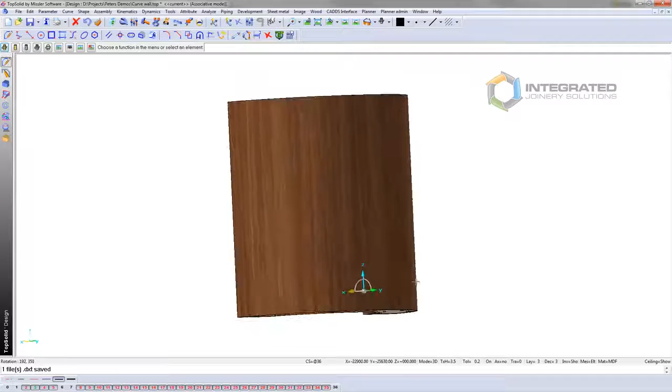What we've got here is a typical wall for a project, and this wall has been built up using an internal frame and clad on the outside like you normally would. But this wall has been built as a smart assembly, so we can use a single assembly to cater for all the different curved wall variables that we can encounter on this project.

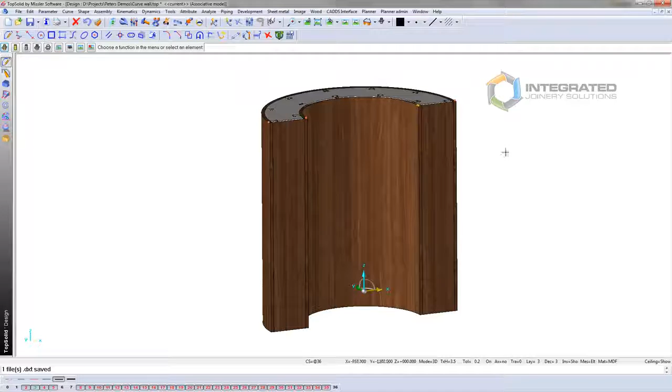So let's remove the outside skins. We'll click on them, move them out of the way, and I might lay this down so you can see a bit better what it looks like. Here we go, I'll move that back over there.

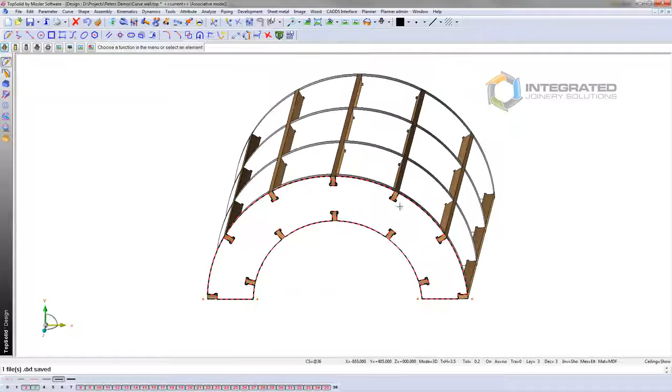Now you see how this is made. You've got your ribs and we've got rails. We've housed the ribs into the rails with these little slots that have been routed in, and you'll notice we've got a 1.5mm gap between the edge of the rail and the jaw of the groove.

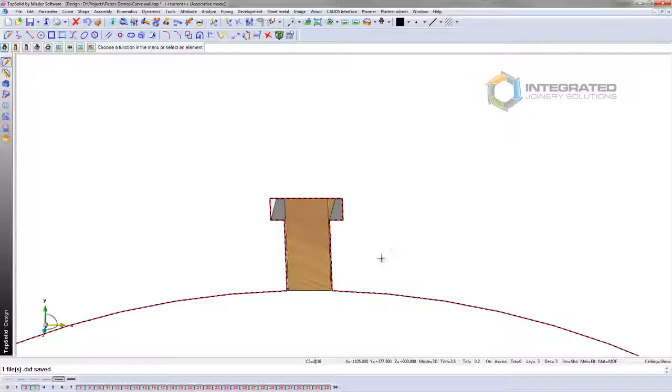And then we've done these little slots off to the side, which facilitate removing the internal radius you might get here if we didn't have them. So we've got a complete flat surface for the rail to sit down onto those ribs, so there's no need for chiseling or any other work like that.

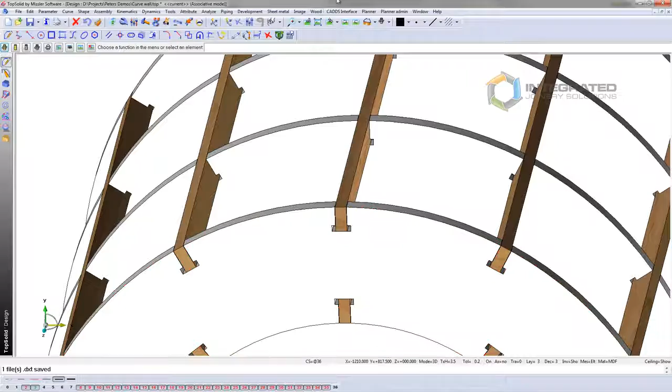So what we want to do is demonstrate how this can be changed on the fly, this one assembly, to cater for all these different things.

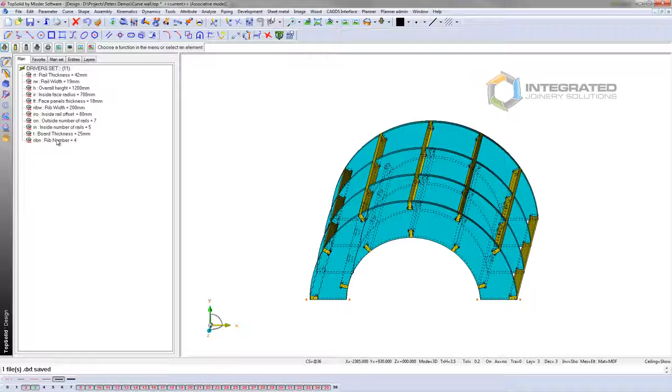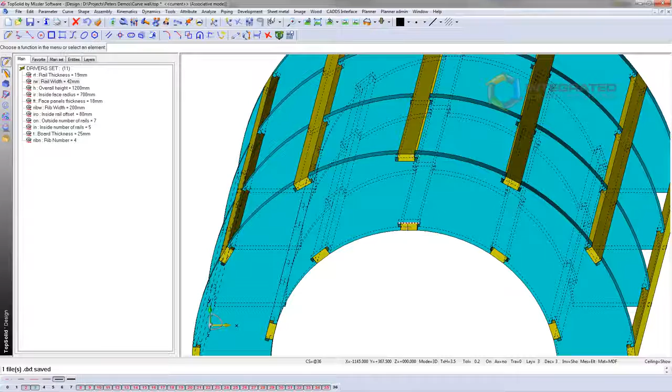So the first thing I want to do is change these rails around, and I'll show you these drivers. Now this panel off to the left here is all the different variables we've built into this assembly that we can change to alter this to meet the site conditions. So if we want to alter the rails, at the moment they're orientated so that you've got the short edge of the rail pointing to the outside. If we want to change them around, we can just change that to 42, and there we go - those rails have been flipped over and the machining is all updated at the same time.

So let's also alter the internal radius here. At the moment it's 700, but on site we want to make this 500. We've set this construction up so that radius is governed by the finished face of the inside panel, so everything else is driven off that in this particular case.

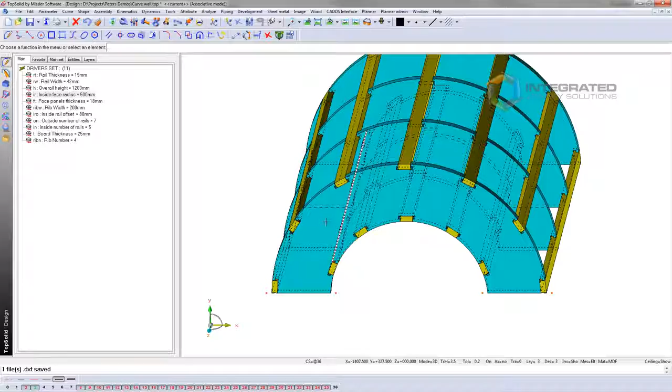That's been updated. Now let's also look at updating the width of the rib, so from here to here - rib width - let's make that 120, okay.

Now it might be a bit crowded on the number of rails here, so let's have a look at changing the number of rails. So the outside rails, let's make that 6, and inside rails, let's make that go to 4.

How's that? So that's all been recalculated - all that machining's been redone with a couple of mouse clicks. You can't get simpler than that.

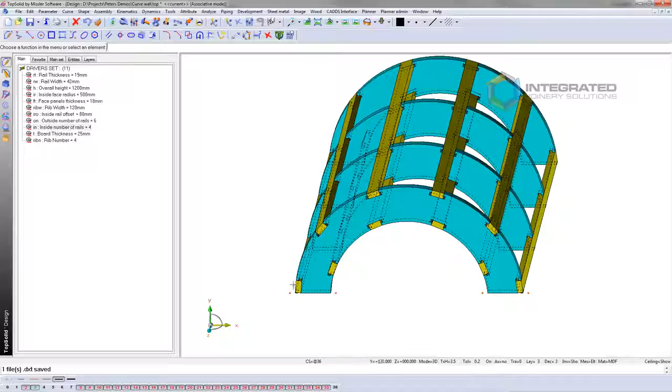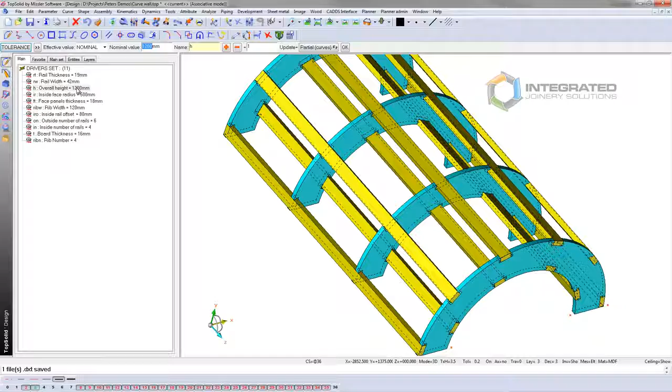Now let's have a look also at the material. I've made this template out of 25mm, but I know I've got 16mm in stock, so I want to use that up. So I can just change that to 16. That's all been altered. And on site they want this to actually be 2100 long, so we'll change that to 2100.

Now that's getting a bit of a large space between each of those ribs, so I want to put more ribs in. Let's put in 7 ribs. Want to alter that to 8 even if you wanted to.

So that's how simple it is, and it's all been redistributed along that line there. So if we're happy with that...

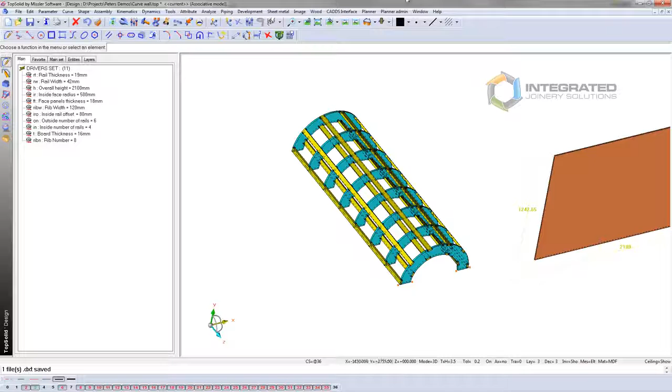Next thing I want to show you is also in layer 6, I've already unfolded the outside panel here so you can see how large that is. So if I put this on screen, see dimensions here - that's how large it is. 2100 is the length, that's the width.

Now if I change the radius now to say 400, see that's been recalculated straight away. Change it back to 500, there it is, changed. So TopSolid'Wood unwraps or unfolds any bent panels, makes them into a flat panel, so you can then process that with the rest of your job. You're not trying to recalculate it off in a different program - it's all done within TopSolid'Wood.

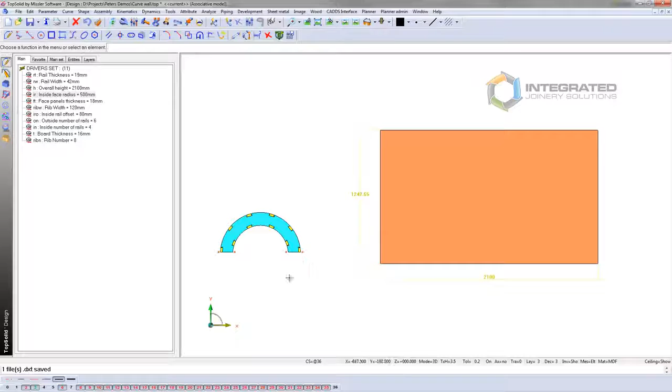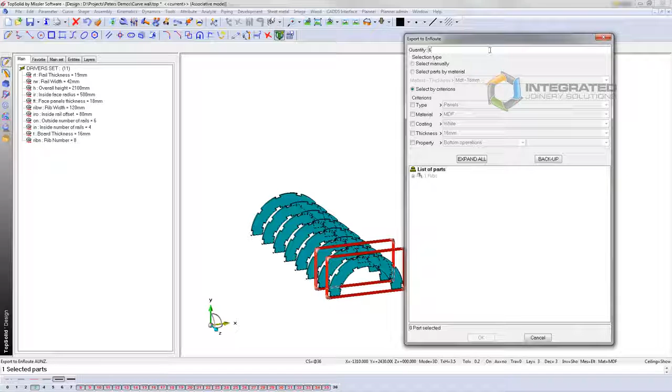So that has sent one part to file. Now we want, just say how many - we'll just say we want 6 of these walls. So we pick that, pick the panels, yep, done, and okay.

Now that's sent that off to EnRoute. We can now open EnRoute. There we go. Now we'll just check the thickness of the material we got here. The sheet size is here that you're going to put on your machine. And we go here, add a file. There it is, and we go open. And there we go, and we process them.

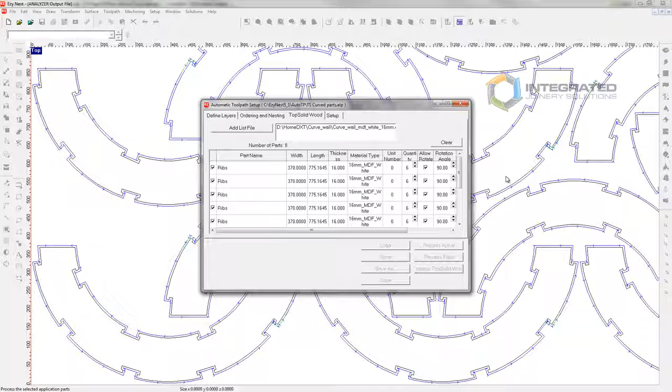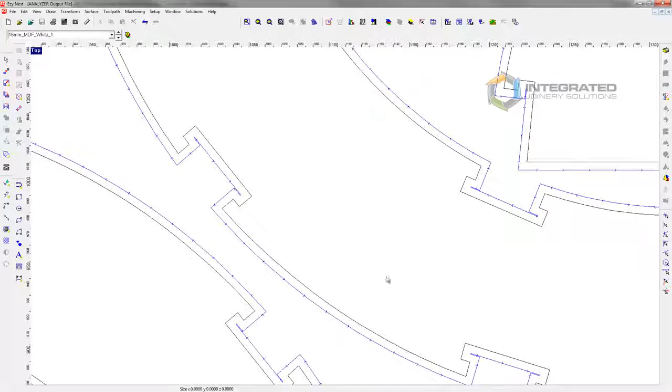So there we have true shape nesting has just been taken out. You can see that the machining, the tool paths have been assigned - they're running into those little slots we designed, back out again. All the feed speeds, feed directions, the nesting is all done.

There's no more need for any intervention now by you, the operator. That is ready to go to your machine. So in this case here, we've just got 2 boards and that's ready to go.

So I've taken you then from a design that was a smart assembly right through to your nested machining there. Thank you for watching. I hope you've gained an understanding of how TopSolid'Wood can help you work more efficiently with smart assemblies that you can design and build yourself.